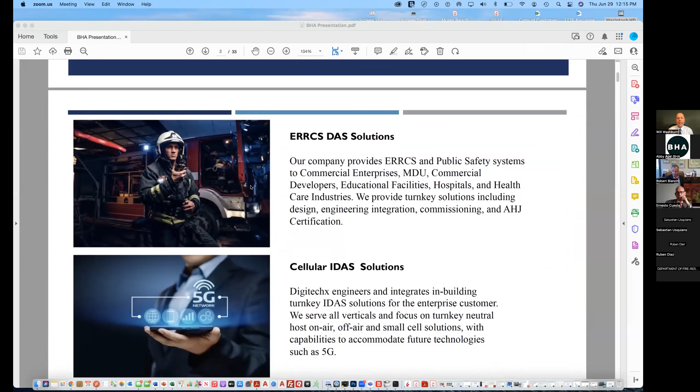We have a strong presence in Miami. It's going to probably be our biggest market with these new mandates. We've had experience, this isn't our first rodeo. We built the Southeast Financial, put in cellular as well as an ERRCS system and BDA. We did the Epic Hotel, same thing, a DAS solution with ERRCS. 801 Brickell, we built that as well, and 701 Brickell. I wanted to let you know we're a seasoned specialty contractor, and it's important to understand not everybody does this. There are a lot of electrical contractors that don't specialize in this field, and we do a lot of integrations for them. We have the acumen and prowess to build these, especially in this region.

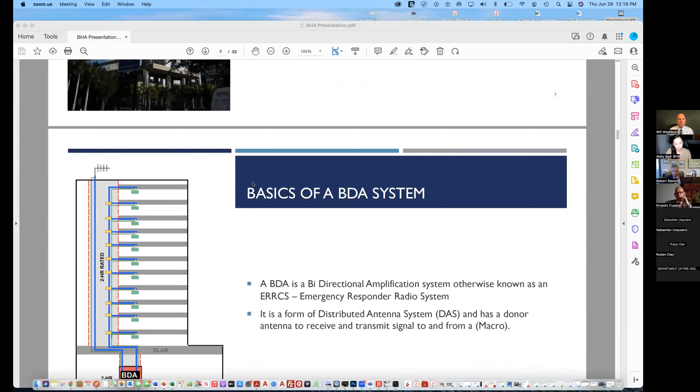We've got some experience, so let's talk about the basics of a BDA system. A BDA system is a bidirectional amplification system that gets a feed from the roof from a donor antenna, and through that donor antenna it goes down into the bidirectional amplifier. The signal gets amplified, and then it pushes it out through a distributed array of antennas. That's actually the term we should use going forward, because this is a DAS system, a distributed antenna system.

What it does is allow us to cover dead spots within the building caused by densities like concrete and low-e glass. A lot of folks have retrofitted their buildings with high impact double pane windows, and a lot of those are low-e glass, which is energy efficient glass that actually blocks cellular and RF coverage because it has a thin film of aluminum that helps dissipate heat and blocks out those specific waves. RF signal is one of those waves.

Because of these building densities like concrete, elevators with steel in them, and this low-e glass, there are quite a few areas, especially in the Brickell corridor, where the densities are high and there are other structures that prohibit us from having clear signal within the building, especially for emergency responders in critical areas like elevators, stairwells, and pump rooms.

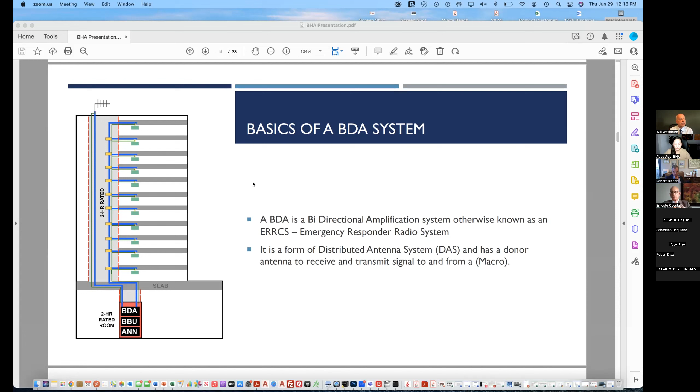So this bidirectional amplification system is part of a macro system that the city provides signal for their emergency responders and fire personnel, as well as any other first responder that enters the building. The macro donor site emits a signal through the donor antenna on top of our buildings, and it goes down into the BDA and pushes out signal to the distributed antennas throughout the building.

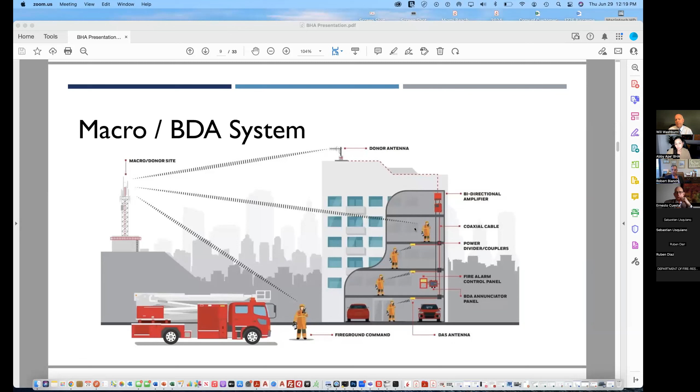So when a firefighter is in the building and keys up, it'll find the nearest antenna, go back through the BDA system, amplify it, and push it back out to the macro. This allows connectivity for people at the fire command center, for people at dispatch, and for those in the building who are responding to an emergency.

Some of the radio frequency dynamics that are important to understand: radio waves emit from the macro tower and fall to the ground, getting weaker over distance. There are obstructions that impair coverage, like buildings in the way, and this is known as path loss. A signal may come out of the macro at plus 33 dBm or higher, and may be reduced to a negative number like neg 70 or 80.

I'm not going to get into the dynamics of what this means, but they're intended to provide coverage when we're in these buildings. Because of the densities, that signal strength may be reduced to maybe neg 95 or better, which happens to be the national standard for what your building has to have for coverage in 95% of the common areas, and in this jurisdiction, 100% of the critical areas. So neg 95 is the threshold where we determine whether your building has dead spots that don't qualify and require remediation.

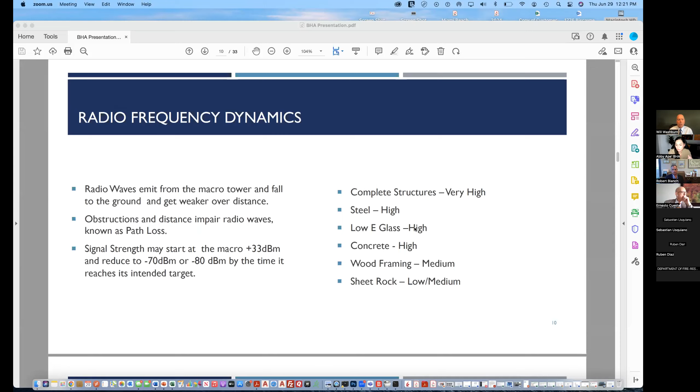Some of the impairments are complete structures, of course, buildings between the intended target and the macro. Steel is a high density impairment, low-E glass is almost equivalent to 18 inches of concrete, concrete itself is high impedance, and then wood framing and sheetrock are more medium and low. So when we get into the analysis of what exists in your building as far as coverage, these are all important factors.

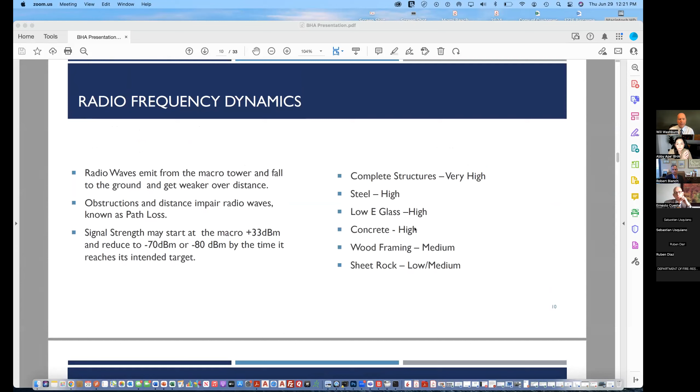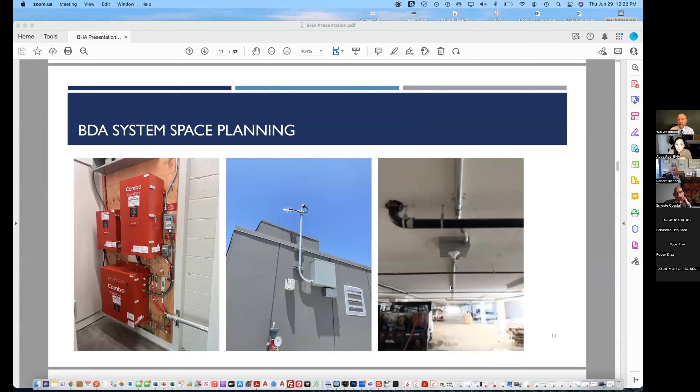I got some pictures here to show you just to see what these look like. This here is a BDA, and this is another one. This is also a battery backup unit that's required to be put in place so these run continuously for 24 hours. This is what a donor antenna looks like on the roof. And then this would be a distribution antenna of sorts that we'd put in the garages, because naturally they're the lowest part of the building in a lot of cases, and this is where coverage is challenged, okay?

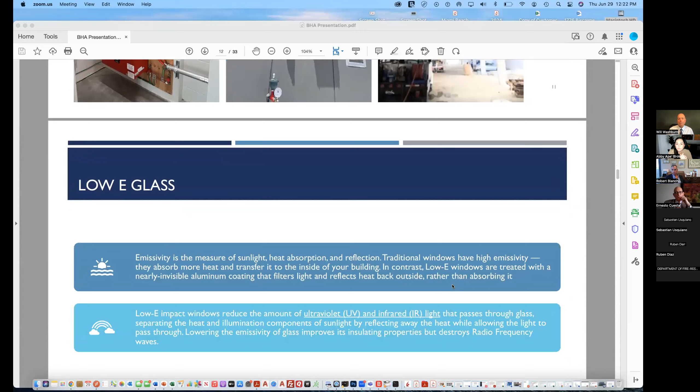We talked about the low-E glass, and I've done a lot of signal surveys in this jurisdiction, probably about 60 or 70, and every building has different dynamics. Southeast Financial, for instance, was very hot at the perimeter, but all of its elevators failed, and that ended up being an elevator retrofit and stairwell retrofit. Whereas some other properties, when you get thick into the Brickell corridor, I get floors that are failing in the perimeters also because of the use of low-E glass.

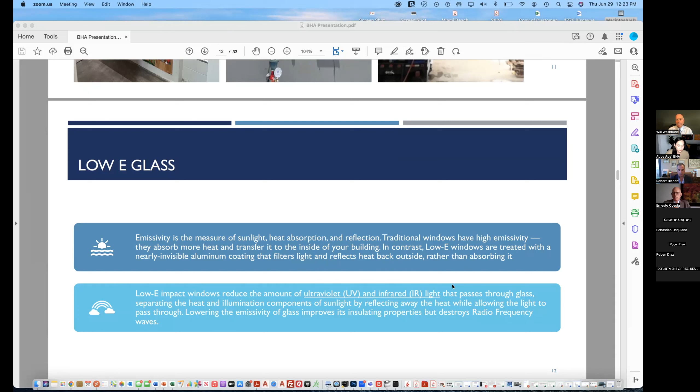Basically it blocks ultraviolet and infrared light that pass through the glass, separating the heat and illumination components of sunlight and reflecting it away. That gives it the LEED certified standard, which is more energy efficient. However, it blocks radio frequency because of the thin film of aluminum. So every building in that corridor has different dynamics. I know there was a question and discussion about what buildings need this and what's traditional.

It's a mixed bag, especially in this Brickell corridor. This is a national initiative, originally initiated by the National Fire Protection Association as well as International Fire Code, but the authority having jurisdiction is usually the municipality. In this case, Miami city standards are augmented a little from the national standards, and the minimum coverage you need in a property is neg 95 or better in 95% of the common areas in the floor coverage. Coverage in critical areas needs to be 100%. Those areas are stairwells, elevators, pump rooms, fire command centers, and things like that, where the emergency responders are going to be.

There's another standard called delivered audio quality, and that's subjective—it's what your ear hears. It's rated on a scale from 0 to 5, and we need 3.4 or better in this jurisdiction. So those are the standards for Miami City. Now if you go out into the county, there's different frequencies to cover and different standards. Miami Beach has their own set of standards, Broward County has their own set of standards, but most of the individuals on this Zoom are probably from the Brickell corridor, which is all within the city of Miami, and the AHJ there is the fire department.

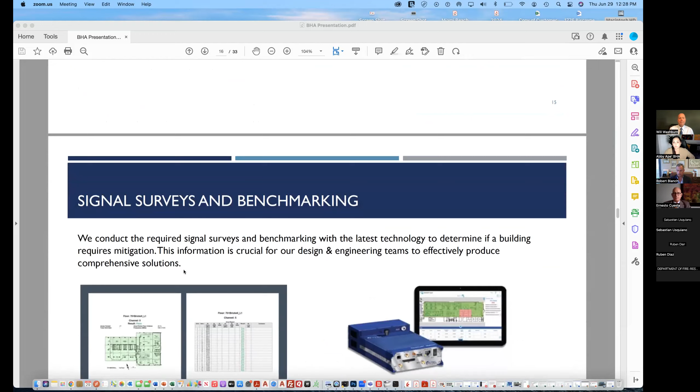So in pausing and understanding what this is, I think the first thing that property owners need to do to determine where they are in the compliance process for these mandates is a signal survey. And the signal survey is a benchmarking of sorts.

So we come in with sophisticated test gear. This is a picture of ours. We happen to use the PCTEL IB Flex scanner, which is a very expensive piece of equipment that allows us to go into a building and put a grid over your floor plan and test each individual grid and determine what kind of signal we're getting from the downlink from the macro. It's very accurate and very precise, and it's geared for this function only.

There are other types of test equipment and Anritsus that you can come in and test specific cells, but a lot of the function is manual, where this is all automatic.

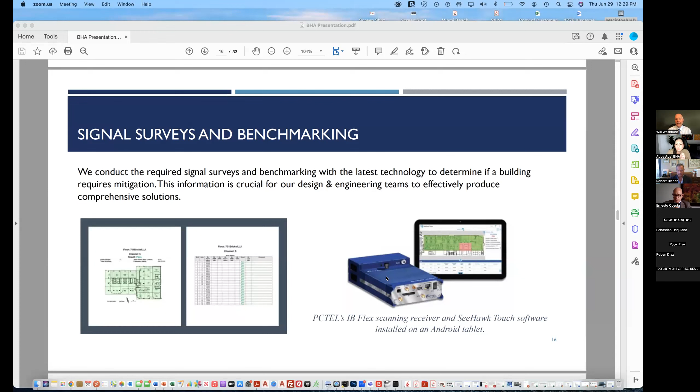And we load the frequencies in, we turn the system on, we get on a floor, we test the entire floor and each cell, we take the readings. We also go into the elevators and close the doors and take a test on every single floor in every elevator, because those are critical, as well as the stairwells.

So if you look at this next slide, you will see quite a few different tests. So the green areas represent passing. So on this particular floor of this building, everything passed, but you see these little red triangles and these green triangles? Well, those are your sensitive areas.

Over here, we have a stairwell. It passed, but we've got elevators right here, and each one of these elevators failed to produce a signal that was negative 95 or better.

Each one of these cells are the common areas of the floors, and you can see signals of negative 83, negative 80, negative 90. These are all passing scores.

But our critical areas in the elevators in the core of the building, mind you, are generally failure because they're in the center of the building. They're usually surrounded by concrete. Then you have a steel cage moving up and down with steel doors.

So historically, I find that this is kind of a typical signal survey if they're situated close to a macro, that the core of the building needs coverage.

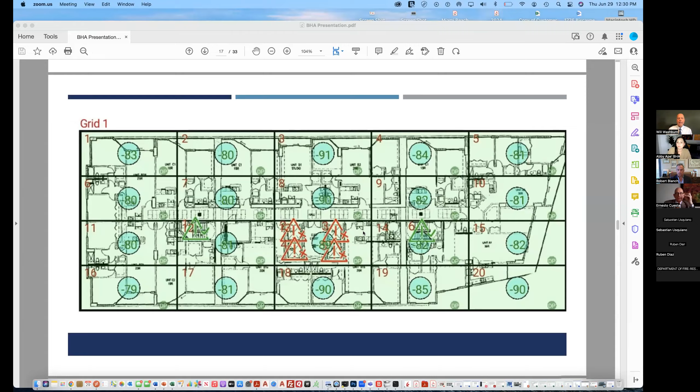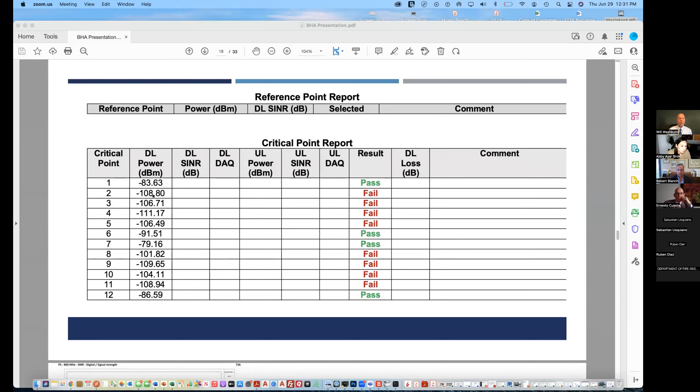And down here is the reference for that visual we just saw, and shows what the levels are. And in the critical areas, you can see signals of 111, 106, 108. Those are not passing scores.

So when we talk about signal surveys, it is the most important part because of determining where you are in the compliance process, because it gives you a roadmap of where you have dead spots and where you have good coverage. And I have to commend...

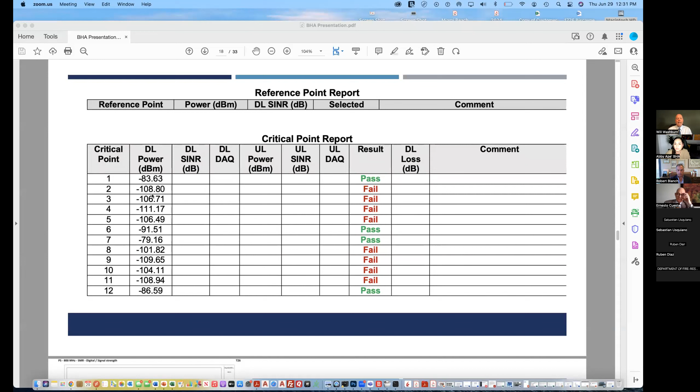The fire department and the architects of their laws and rules here, because they were very succinct in developing a plan that only provides coverage in the areas that are required, because it's a very complicated process from an RF design standpoint. It's unlike cellular, where we want a big bloom over the entire building and actually going outside so you maintain coverage to your cell phone.

We need to keep the signal indoors. As a matter of fact, if our donor antenna hears any of our distribution antennas, it can put the whole city system into oscillation and render it useless. And it's happened in this jurisdiction before.

So it's up to contractors and designers and engineers like ours that design these buildings to only put antennas where they're required. And this is the first jurisdiction that I participated in.

I've worked in 34 jurisdictions that actually come out and take a proactive stance and do uplink testing to confirm your results of the signal survey and say yes, we want antennas here, but we don't want them there.

Additionally, it's one of the first jurisdictions that has actually placed antennas and required us to place antennas in the elevator hoistways. This is brilliant because you have basically a moving Faraday cage in an elevator, which blocks transmission, and we need to get those antennas as close as we can to propagate through that steel car that's moving up and down these hoistway shafts.

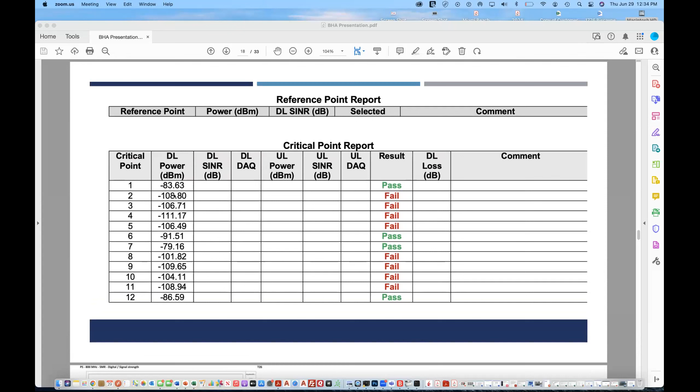So that's such an important step, the signal survey, and the radio shop will actually come out with the survey after we submit it to them, and they'll confirm everything. They'll test their radios in the elevators. They'll test their radios in the stairwells. They'll get uplink and downlink readings and confirm the results of our benchmarking.

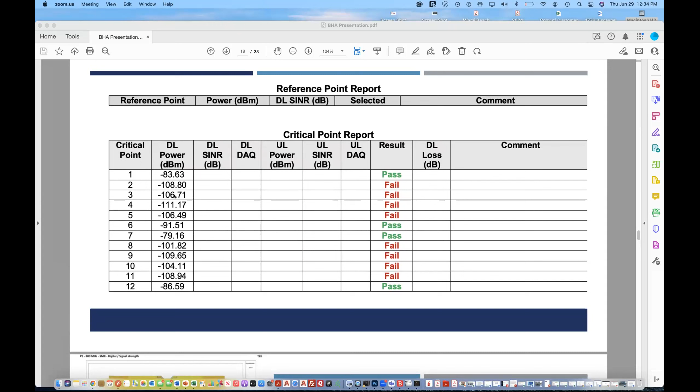And from there, we take that combined effort to determine how to design this, keeping our signal inside the confines of the building, because the worst thing that can happen is that we leak outside the building and we cause interference, and the firefighters and first responders cannot use their radios because of oscillation.

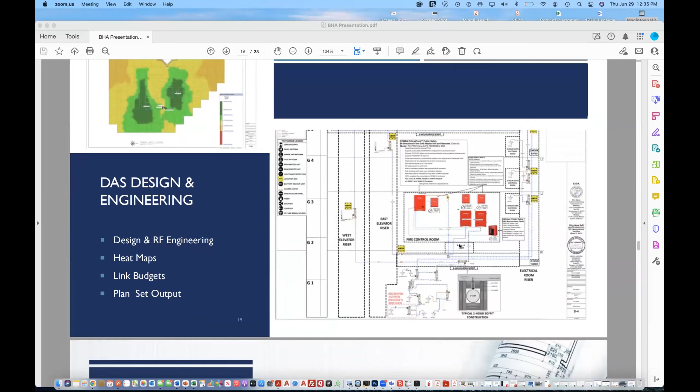So there's a lot of rules that go into designing this and getting through the process of plan check. Again, a very comprehensive process here. The permit and plan check is very comprehensive and takes time. We try to anticipate this, but there's usually several rounds of changes and corrections that we need to do to make sure we're compliant with all the local and national codes.

So it starts with the grid test, then we get the radio shop visit, then we move to our notes to the design team, and they get a copy of the grid test. We do the design and engineering, and we render a full stamp set, stamped by an engineer, which is required in this jurisdiction. We submit it to the radio shop, and they sign off first because they have the notes of where the antennas need to be placed.

Once we get their sign off, we submit to the formal plan check, electrical and fire. Again, this is a comprehensive process. Timeline, this could take anywhere from a month to 3 months.

I don't know, Richard, if you're on the webinar, but I suspect that plan check is probably going to get bogged down here with all the new submissions, with everybody trying to get compliance. So I don't know if I'm accurate at this point, but let's say it's anywhere between a month and 4 months for good measure. We get our corrections, we make them, we submit them, and then we get approvals from electrical sign off, and fire.

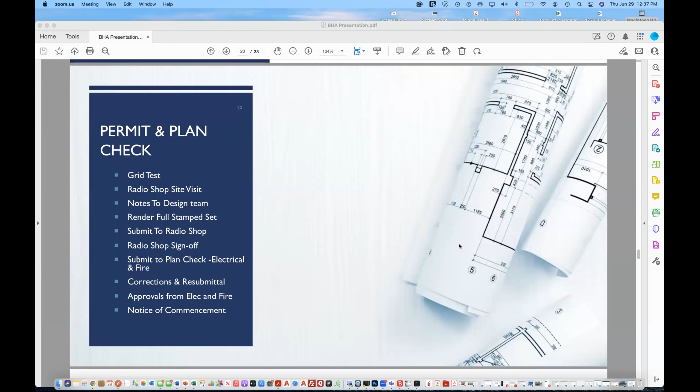And of course, the design and engineering. So we're running out of time to get compliant. I just wanted to note that the sooner you can get this process started, the better chances of getting compliant by year end. That's an important deadline that's looming.

And then we get into the integration phase. We have to order materials and equipment. We've had some constraints getting cable over the past year due to supply chain logistics and the constriction of supply from China. That's gotten better, but that's a factor.

Then we have a construction start. We do our scanning and coring. Sometimes we have to core up through stairwells and into elevator hoistways. Then we install the conduit in the elevators, in the stairwells, in the garage and other common areas.

It requires the participation of your elevator companies, which are usually Otis, Schindler, Thyssen, or Kone, because we have to ride on top of their elevators and they have to operate the cars for us to get our infrastructure in place in those hoistways. This is expensive, mind you, because they usually charge between $300 and $500 an hour, and it takes quite a few hours to get this infrastructure in place.

Once we get our conduit done, we install our cable, our fiber, our connectors, our couplers, our antennas, grounding, and active and passive infrastructure - the BDAs, the remotes, the annunciator panels. And then we have to take this system and bring it online.

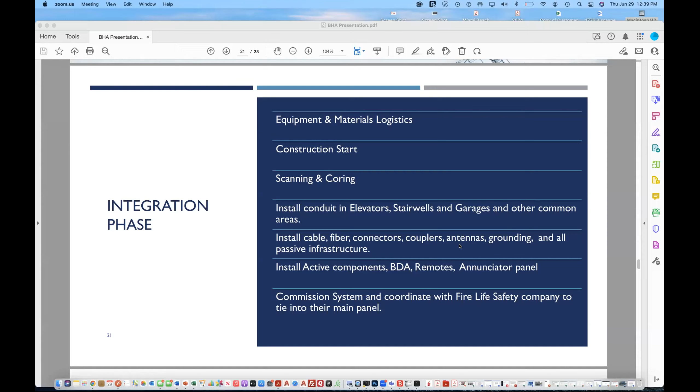Interesting, I'm not sure what happened to Will. He was on a roll, and may I add, he had so much good content. Hopefully he's able to log in again. But man, there was so much good content that he was able to produce to us.

We're going to go ahead and wait a few minutes, but before that, we have some questions we can dive into, Robert. Yeah, I've noticed we have a question about whether, since this is a request from the city, there would be any cost or any tax credits for the financing or funding of this project.

Frankly, this is not necessarily a request from the city. I mean, it kind of is, but it started at the state level, at the legislative level, and then of course the local authority having jurisdiction, in this case City of Miami, and we have Chief Diaz on the line to chime in if he'd like. We are not aware of any tax credits or other governmental subsidy to offset the costs associated with this project.

There's another question I've noticed, which is we have 6 months to get this done - why are we being given such short notice? The fact of the matter is the legislature adopted these statutes a few years ago, and the deadline was specified in the statute. If my memory serves me correctly, I think the legislature has even extended the deadline.

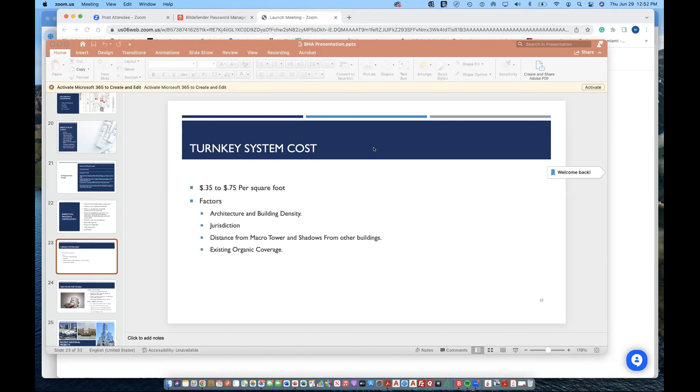Another thing a lot of folks are talking about, and we responded by bringing another model - typically on a CapEx build, the customer owns and funds it. We design, engineer, build, and commission the system, and other vendors like ourselves then have to perform maintenance and monitoring because it's required by the city to get certification. We have a long-term maintenance agreement in place where we test these systems annually and come in to determine if things are working as they should.

That particular event could trigger a technology refresh, or if the city rebanded their frequencies or changed frequencies, we would have to accommodate them and upgrade our systems to handle those changes. So we came out with a service where, for a subscription fee, we install and operate these systems. We own them, we execute the design, build, and integration. We pay for those costs, and we perform the maintenance, monitoring, and technology refresh over a period of 10 years, kind of like you'd get for your cable, where we charge a per-door fee. That helps soften the blow a little bit and shift the expense to the operating budgets.